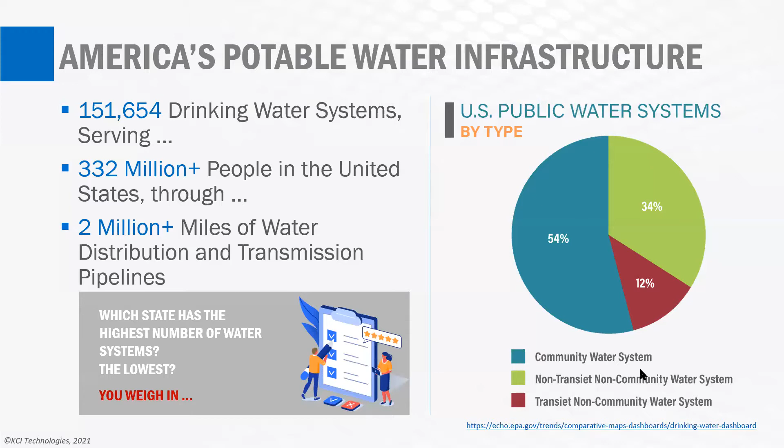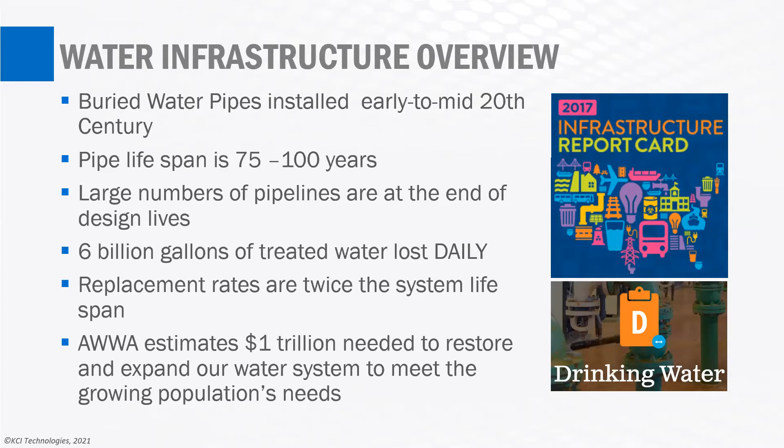Much of the buried pipe infrastructure is now between 75 to 100 years old, essentially surpassing their design lives. As a result, 6 billion gallons of treated water are lost every day through leaks, with an average of 240,000 water main breaks per year. Assuming every pipe would eventually need to be replaced, the AWWA estimates an associated cost of $1 trillion. ASCE's infrastructure report card gave drinking water systems an unflattering D grade in their 2017 survey.

The EPA, in its 2015 sixth report to Congress on drinking water infrastructure needs, states that $472.6 billion is needed over the next 20 years, with 66% of this amount in the distribution and transmission category, that is water pipes. Wow. In comparison, water treatment needs only 18% of that $472.6 billion.

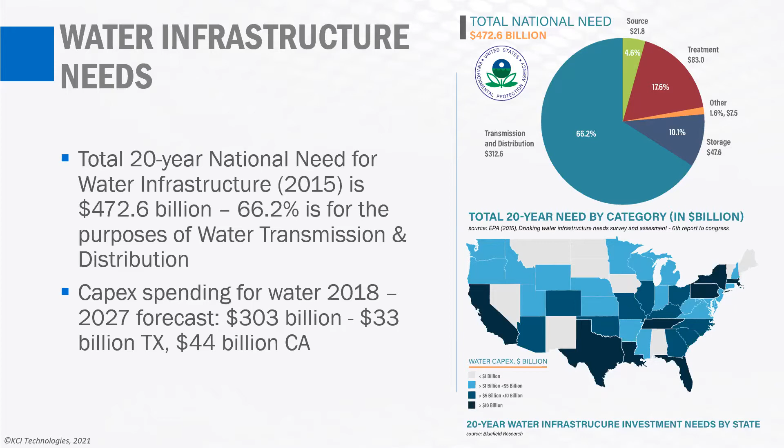In another study that looks at capital spending, between 2018 and 2027, CapEx is forecast to be over $300 billion in the United States. Two of the largest spenders are going to be California at $44 billion and Texas at $33 billion.

There are two main types of pipes used in a water utility system: transmission pipelines and distribution pipes. Transmission lines carry large quantities of water from a source of supply to a treatment plant, or from a treatment plant to the distribution system.

Transmission lines generally range in size from 16 to 24 inch up to as high as 144 inches, 12 feet in diameter. In some systems in the Western United States, there are pipes as large as 256 inches, or 21 feet in diameter.

Transmission pipes generally run in straight lines from point to point, have few side connections, and are not tapped for customer service.

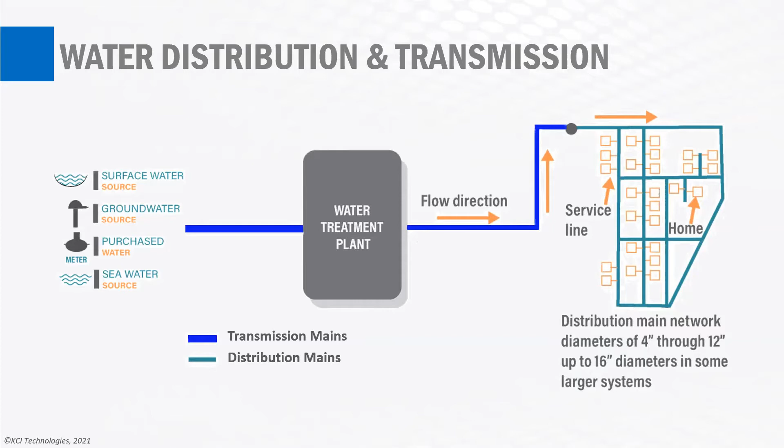Distribution mains, on the other hand, are the smaller pipes that carry water from the transmission system and distribute it to homes, businesses, and all other parts of the community. These diameters typically range from 4 to 12 inches. In some larger systems, you may find distribution lines as large as 16 or sometimes even 24 inches. Distribution lines typically have many side connections, and tapping is done frequently to provide water to customers.

So again, in today's presentation, our focus will be mainly on large diameter transmission pipe design, construction, and maintenance. Large diameter transmission lines in service today include primarily welded or riveted steel pipe - the riveted stuff comes from pre-World War II.

Reinforced concrete and concrete cylinder type pipe, such as prestressed concrete cylinder pipe, and cast iron and ductile iron pipe. Iron pipes are typically no larger than 64 inches, while steel and concrete pressure pipes are up to 144 inches, and of course larger in some cases.

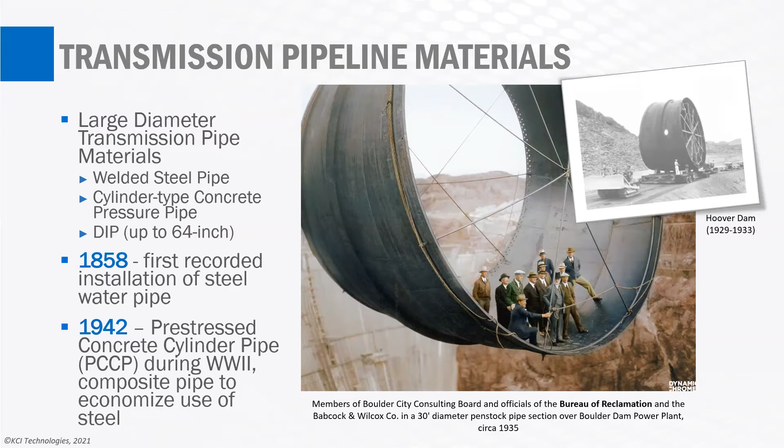Steel pipe, that is riveted steel pipe, was first installed in the United States in 1858, and prestressed concrete cylinder pipe was first made during World War II in 1942.

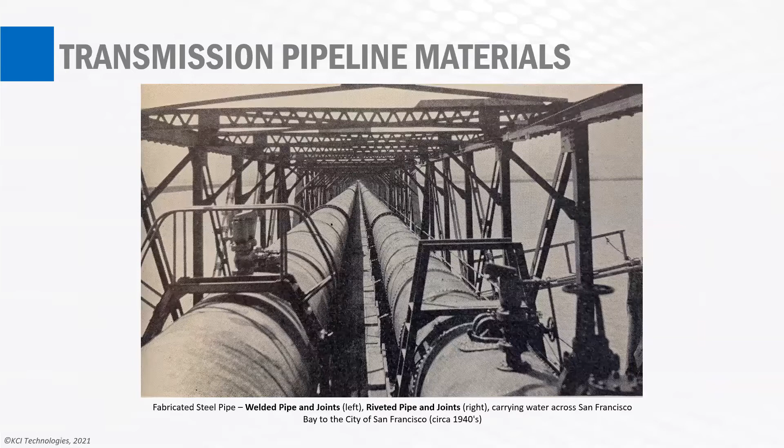This picture shows new and old technology from the 1940s. That is a welded steel pipe, which is the one on the left-hand side, and a riveted steel pipe on the right-hand side, carrying water across the San Francisco Bay into the city of San Francisco.

Welded steel pipe used for water transmission is also called spirally welded steel pipe. As shown in the top left drawing, steel coils manufactured to the thickness of the pipe, accurate to 3 decimal places, is helically wound into cylinders, while both the inside and outside seams undergo fully submerged arc welding.

These cylinders are then typically cut to 50-foot lengths, hydro-tested, and then ends are treated per the type of joint specified for the project, and coatings and linings are applied for corrosion protection. The final products are relatively light compared to concrete pipes of the same diameter.

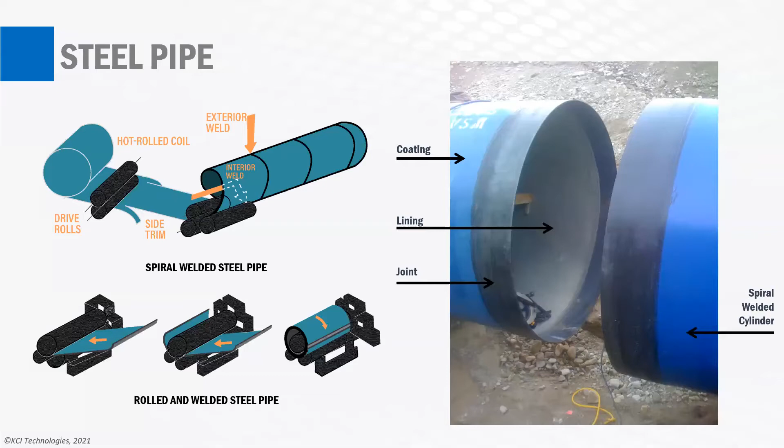The other type of steel pipe shown on the bottom left drawing is called rolled and welded steel pipe. Casing pipes are typically made as rolled and welded steel pipes.

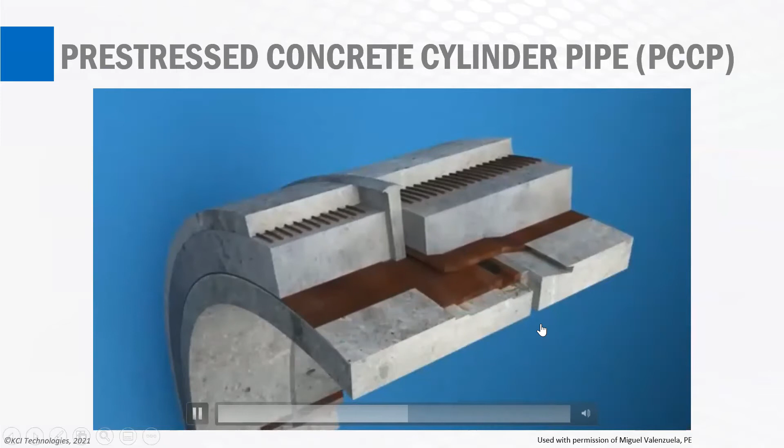Finally, prestressed concrete cylinder pipe. During World War II, PCCP was the result of our efforts to minimize the use of steel in high pressure, large diameter water pipes, since steel was needed for the war effort.

Lined cylinder pipe was made in 1942, while embedded cylinder pipe was made in 1953. The steel cylinders used in PCCP are first hydro-tested, just like with steel pipe, after which joint rings are welded to the cylinders. In embedded PCCP, the steel cylinder, as shown in this cross-section, is cast within a concrete core.

After curing, hard-drawn steel wire is helically wrapped around the exterior of the cylinder. This results in producing a predetermined compression of the concrete and steel core. The wire is then covered with cement slurry and dense mortar coating for corrosion protection.

Lined PCCP ranges in diameter of 16 inch to 60 inches, and embedded PCCP range in diameters of 24 to 144 inches. It's estimated that between 1942 and 2006, some 19,000 miles of PCCP were manufactured and installed in the United States.

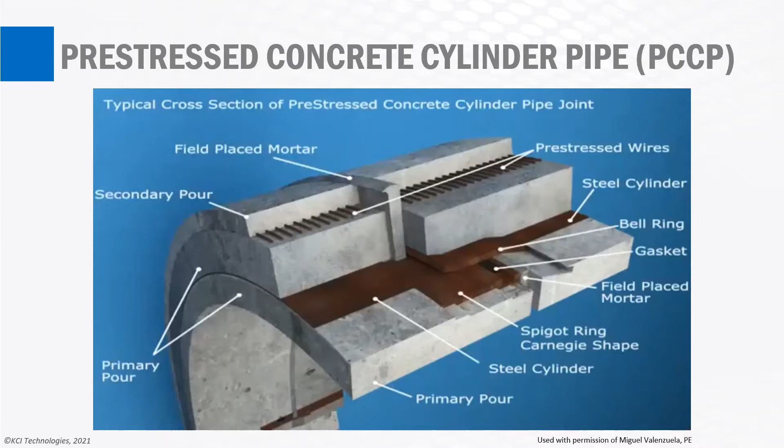So that should give you a little bit of background on primarily the 2 types of materials that we're going to be talking about throughout this presentation. With that, I will pass the presentation now over to my colleague, Dennis Atwood.

Thank you, Shaw. So I've been involved in a lot of conversations where we talk about large diameter pipe, and inevitably someone makes the remark that it's different. And so I wanted to try to see if we can focus a little bit about what is really so different about large diameter pipelines.

I've taken 5 areas, which I think talk about some of the issues we have and things we need to consider when dealing with large diameter pipelines. The first thing I'll be talking about is selection of pipeline alignments. Then we'll discuss risks in a small amount, types of large diameter pipelines, large diameter valves that go with large diameter pipelines, and of course construction, inspection, and testing for large diameter pipelines.

Okay, so the first thing, selecting pipeline alignments. Now, what are some of the challenges that we have? The importance of selecting the best pipeline alignment cannot be overstated. Choosing the right alignment can save millions of dollars in construction and land acquisition costs, not to mention the disruption to the public.

Now, cities are continuing growing and need water to be able to accommodate this growth. Most cities' existing water sources are fixed, and developing new sources is usually not an option. So it becomes necessary to bring water from the source to where it's needed. So the question arises, how do you get from here to there with a transmission main?

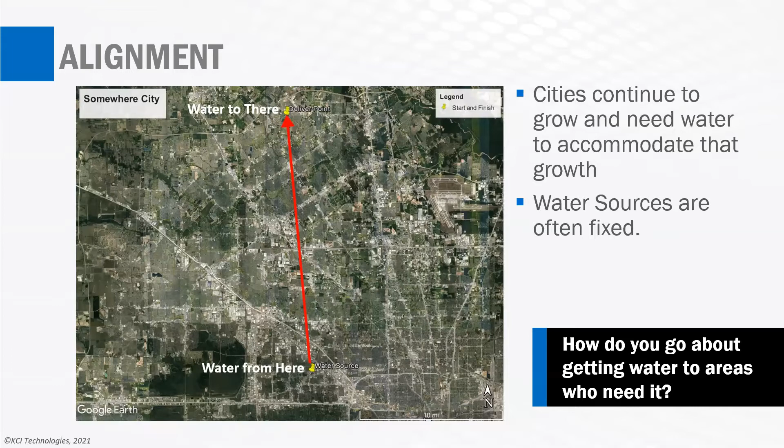Now, traditionally, we've relied on our existing street infrastructure for pipeline corridors, but as more and more development has occurred, our streets have become congested with utilities. You may be able to snake small utilities or water lines through these congested streets, but when it comes to large diameter pipelines, that's another matter.

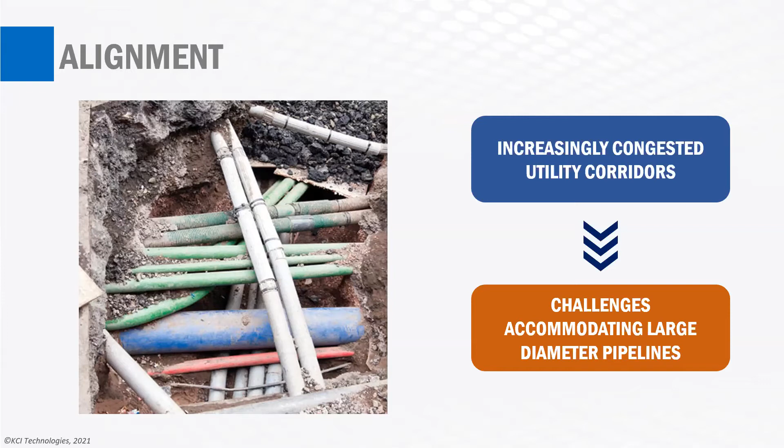Large diameter pipelines have large footprints and will take a large portion of the street during construction. Installing a large diameter pipeline will also use considerable real estate and make it difficult to accommodate other utilities in the future. So transmission lines usually span great distances in order to bring water to growing areas.

As cities begin to sprawl, all the new growth seems to be on the peripheral, whereas a lot of the water sources are more towards the center or one end of the city, as that is how the city grew.

Just to give an example of how large some of these transmission lines can be or how long they can span, I'm currently working on a project in the city of Houston, which is 17 miles in length. And the longest one I've worked on was over 30 miles. So you have considerable real estate to cover that you need to consider how you're going to go there.

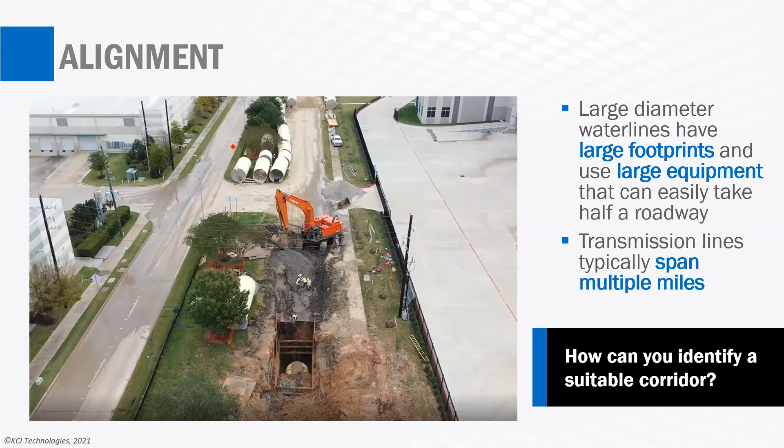Traditionally, before computing and GIS, what we used to do is take a map and determine 3 to 5 possible alignments. Each alignment would then have to be vetted for feasibility. A set of criteria was developed to evaluate the alignment, and the evaluation results were input into a matrix for comparison. Based on the methodology, the preferred alignment was selected from the results of the comparison. This method, however, always left you wondering if you had indeed captured the best alignment.

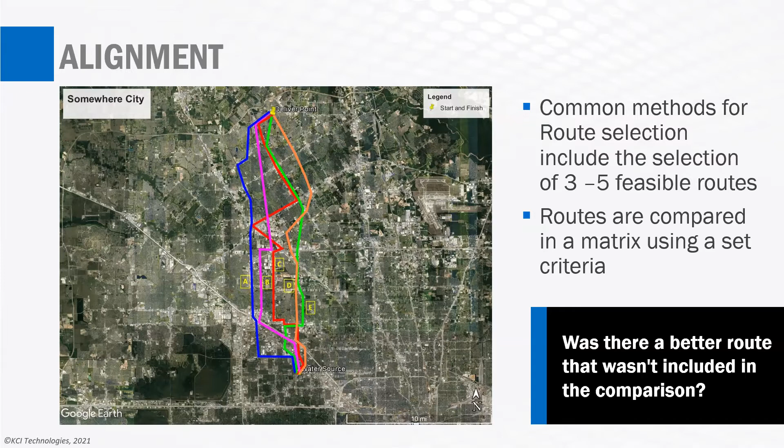With projects costing in the hundreds of millions of dollars, a slight variation in alignment could save the project several millions of dollars and have other unknown benefits.

With the advent of computers and GIS, this has opened up a whole new avenue of analytical methods by which we can determine our best alignments. We do this every day when we want to get from one point to another while driving. We open Google Maps, enter a destination and an origin, and presto, Google Maps gives us the best route based on the fastest route, the shortest route, or the least congested route, depending on what input parameters we gave it.

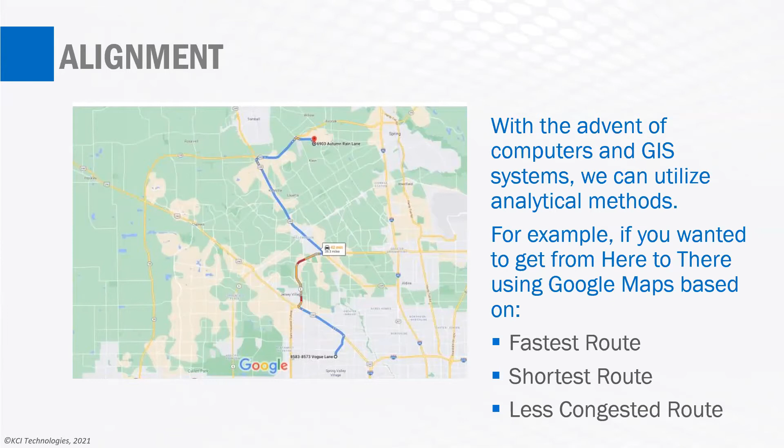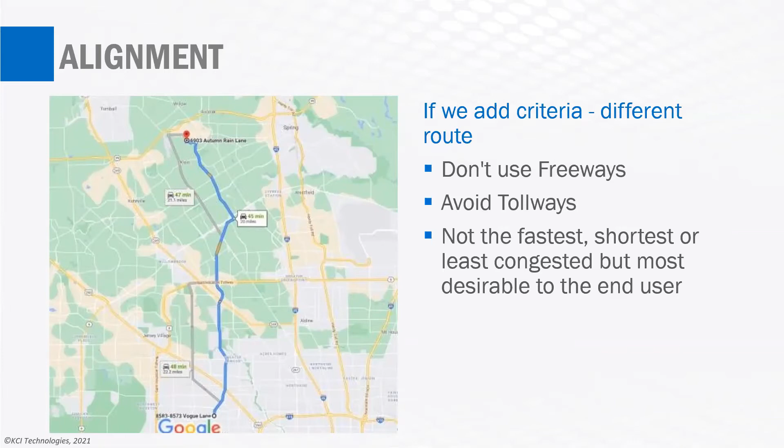But what if someone doesn't like to use freeways or wants to avoid tollways? You can change the input criteria and the program gives you a new alignment, totally different from the previous one it selected. It's not that this route would be the fastest, shortest, or least congested, but it's the most desirable route to the end user.

We can use a similar method when trying to determine how to fit a large diameter transmission line through a highly urbanized area. We want to find the best route, and what is important to one owner may not be as important to another. The beauty of this method is the ability to customize it to the specific wants and desires of the owners or the operating utility.

Some of the parameters we look for include length, which is the determining factor for cost and time to construct. But where we go might determine how businesses are disrupted, how much disruption to traffic, whether we're disturbing residences, whether there are specific areas to avoid due to contamination, large utilities that need to be crossed, freeways and arterial crossings which are always challenging, environmentally sensitive areas such as wetlands, and soil conditions that determine the ease or difficulty of excavation and dealing with water, along with whatever other criteria might be important to the owner.

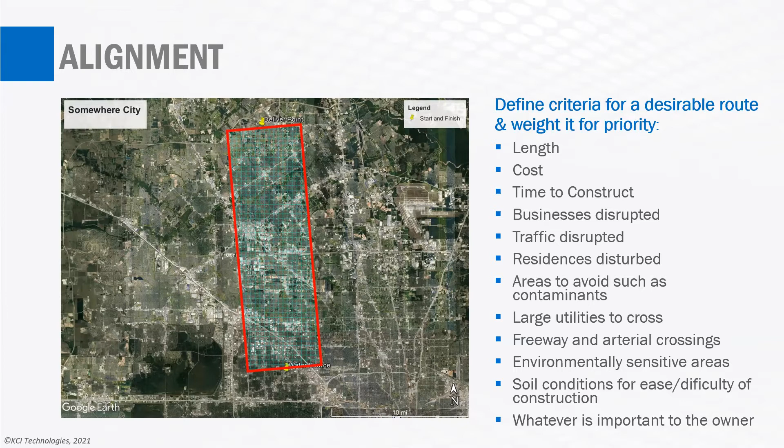So we establish this criteria, but take it one step further. We then weight the criteria because not all of it is equally important to the owner. By putting weighting factors, we can bring the most important ones to the top and the least important to the bottom.

What we do then is develop a grid or a network of links connecting the source to the delivery point. Each segment is individually evaluated against the assigned criteria, and values are assigned based on that criteria. The values are added together for each link to become an aggregate score, and the higher the score, the least desirable the link.

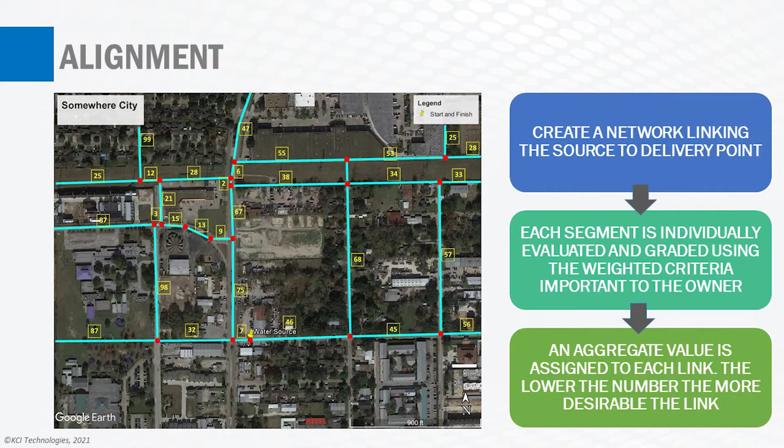Using an analytical program such as Network Analyst, the program determines the combination of links that connects the start to the finish with the lowest combined value. Network Analyst is just one example of a standard software program you can purchase, and it works within ArcGIS to do this.

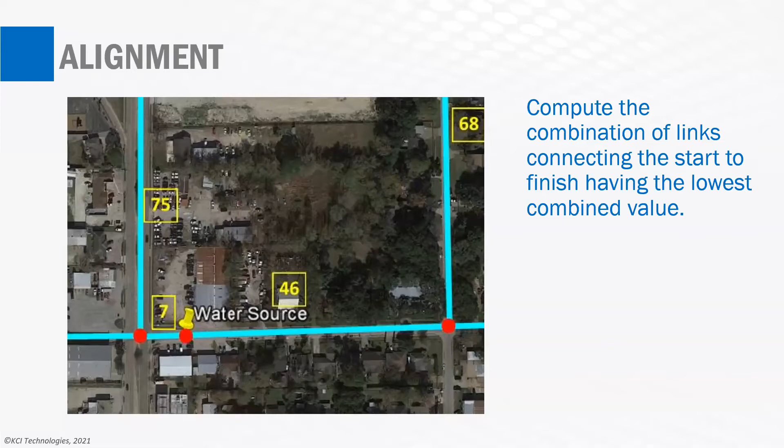But if you want something more customizable, there are a number of programs out there. In one case, we had a graduate PhD student develop an algorithm that worked within GIS and would generate 100 different alignments sorted from the lowest score to the highest. A lot of entities still like to compare alignments, so you can take the top 10 or top 5 and do an individual analysis. The beauty of this type of program is it'll accommodate any kind of showstopper, so if you need to reroute your alignment, you can.

So as I said, the lowest combined value is the best or optimum route that meets the criteria. The analytical method will also allow you to estimate the probable cost, since cost was one of the factors input into that, and then it gives you its total length. And then the other thing is the estimated time to complete. So when doing your preliminary analysis and planning effort, these are some of the valuable parameters it generates that you don't have to recalculate or redo.

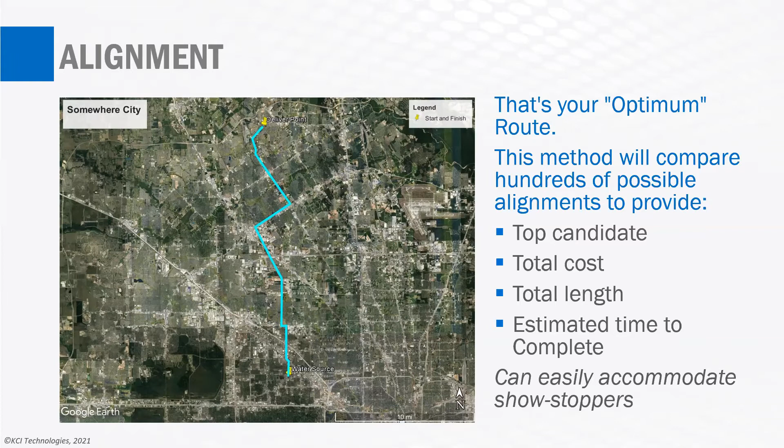Now, as you can imagine, this is a pretty labor-intensive methodology, particularly with these long links. There could be hundreds, if not thousands, of links that need to be evaluated, and so it can take considerable time. But the beauty of it is that, for a planning level effort, it gives pretty accurate results, and so you can work with it fairly well.

If you don't want to spend quite that much time on it, you can use other products such as the Geospatial Analysis. This Geospatial Analysis has similar criteria developed and entered into GIS colored layers or three-dimensional layers, whichever the case may be. The darker the color, the least desirable the area, or in the case of a three-dimensional area, the thicker the layer, the least desirable the area. Layers are then overlaid one on another, and then the lighter area connecting the start point to the end point is your most desirable.

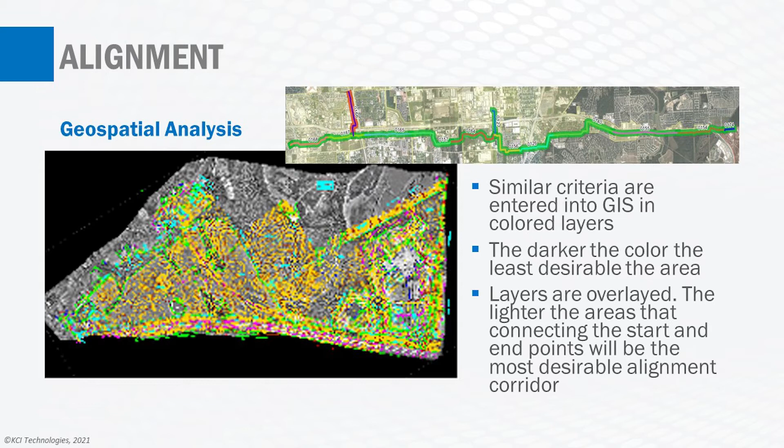The beauty about using three-dimensional areas is it almost creates a topographic map similar to where a river might run. And so you can easily identify the area of least resistance, which is your most optimum corridor.

Let's move on and talk a little bit about risks. Now, there are many risks that you can imagine to a project of this nature. We're only going to talk about a couple of them today. But normally risks are captured in a risk register, and risk registers may include 100 to several hundred identifiable risks depending on the nature of the project.

One of the greatest risks we face that's kind of unique to large diameter pipelines is hydraulic transients, or water hammers. There have been many documented cases of catastrophic pipe failure due to a hydraulic transient within the pipeline. Although water hammers or hydraulic transients occur in smaller diameter pipelines too, they're usually not of the same magnitude, and there have been few cases of pipe failures there.

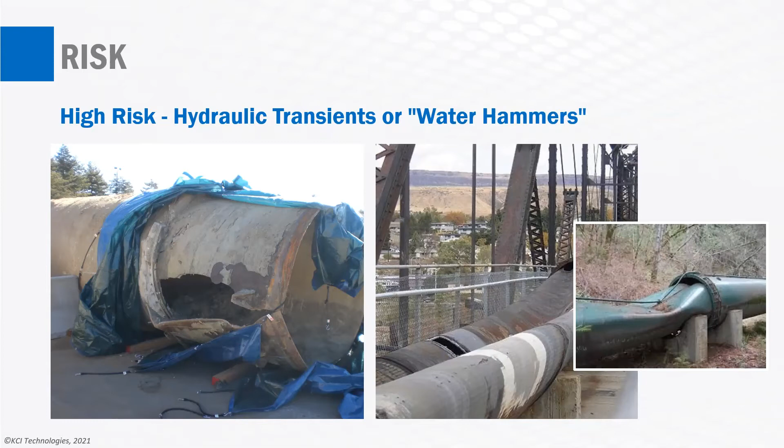Usually a factor of safety is already built into most smaller pipelines that accommodates these. But when we get to large diameter transmission lines that move high quantities of water, the surges created from a hydraulic transient can produce tremendous pressures, both positive and negative, as you can see from the failure modes of these pipes.

The primary way to mitigate this risk is to use a surge analysis program to model the pipeline and predict the surge pressures that the pipe could experience during a transient. The pipeline is then designed to withstand the initial pressure, which can be both positive and negative, as we saw from the previous picture.

Other mitigating measures can also be incorporated. Just as an example, we could add a surge tank to relieve that pressure, or to prevent hydraulic transients in the first place, include pump ramp-down protocols. Sudden pump shutoffs are one of the largest causes of surge, or if a valve is closed a little too quickly, that could be another cause. So a lot of our operating protocols can be steered to prevent surges from happening.

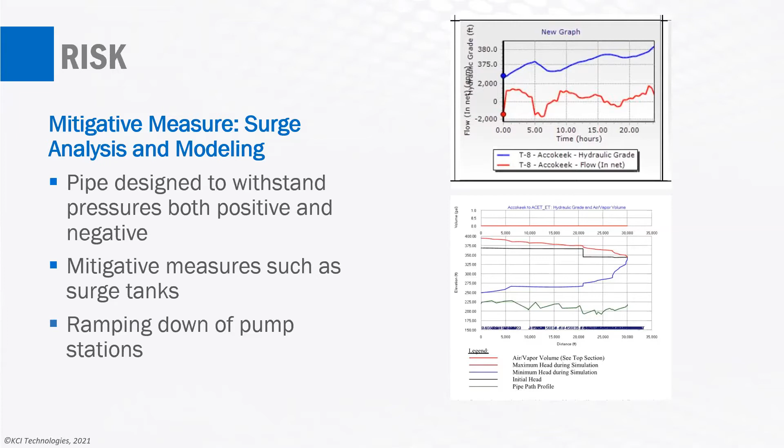Conflicts with utilities are probably the number one risk we face in construction today. Probably the largest source of change orders in a project is due to conflicts with existing utilities. Now, as I mentioned, large diameter pipelines have very large footprints, so if there's a rogue utility out there, it's highly likely that you're going to find it during construction.

So not only are they costly - in this case, the tunneling operation was down for about a week and a half while they relocated the line - so there was a financial cost there associated with standby, as well as a delay cost. But had that water line been ruptured with men in the tunnel, it could also have been a life-threatening situation.

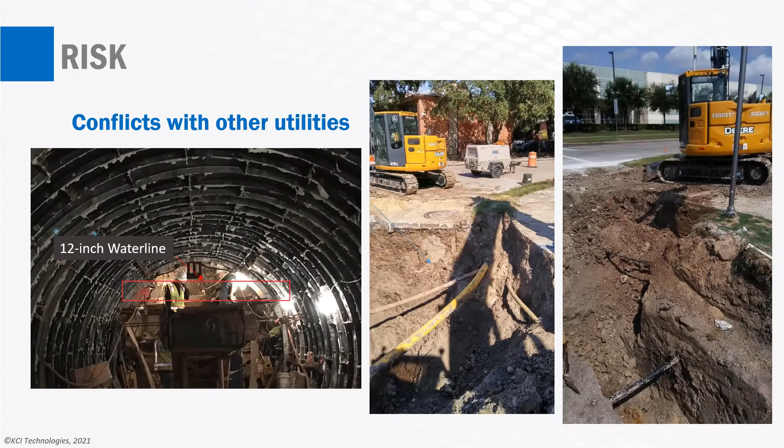So how do we deal with them? Well, of course, the number one method is to have a good subsurface utility engineering program that starts during design and is continued during construction. The subsurface utility programs, or SUEs as we call them, will be able to identify where there are lines that might not necessarily have shown up on plans.

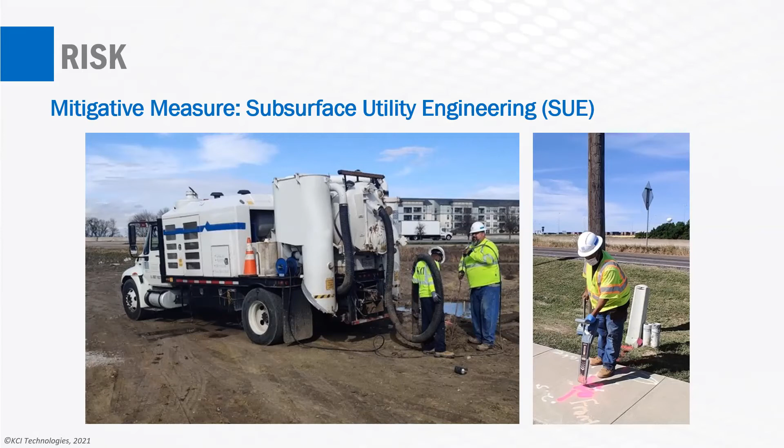They can also use a soft dig vac truck, such as the one in this picture, to find the top of that line so it can be shot and hard located in the field. The beauty of this technology is that it's very unintrusive, so the chances of disrupting any utility are very small. In the old days, as many old-timers know, we used to use backhoes to excavate, and backhoes can be just as dangerous as trenching operations. So we've come a long way since that time.

Let's talk a little bit about the types of large diameter pipelines. This program is specifically talking about concrete and steel, but there are really four materials readily used for pipeline materials. Of course, the most popular and widely used is steel. Concrete is highly used, and then in sizes under 64 inches, ductile iron is pretty well used, especially in the smaller to mid-range. The real small lines, of course, are PVC. And then fairly new to the market is fiberglass pipe, which can go up to 110 inches in size.

Now, all of these pipes, with the exception of concrete, are considered flexible pipe. And although you may not think of steel as being flexible, you'll certainly appreciate that as you see it hoisted if it's not restrained properly. It can flex quite a bit, as does ductile iron and fiberglass.

So the significance of that is that flexible pipe relies on the subgrade or the pipe embedment for its structural strength. So once it's loaded from the soil overburden or any other loads on the surface, what prevents it from deflecting outward is its ability to draw strength from the trench soil surrounding it.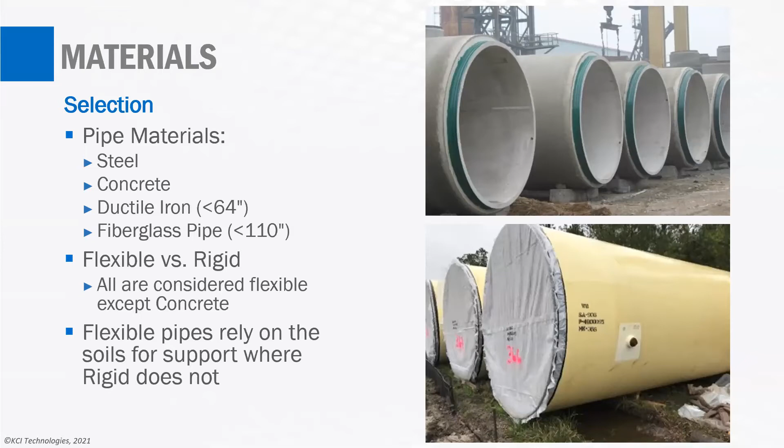Now, one of the things that is kind of unique about steel pipe is its ability to be customizable. It's the only pipe of these materials that is. The rest are more of the nature, if you want to use the phrase, off-the-shelf products. They're cast, usually using molds or machinery that will put out certain sizes or certain pressure classes of pipe. So what you get, you have to order what you get.

And so if one class doesn't work for you, you go to the next class. Whereas with steel, it's built to exact specifications provided by the engineer. The engineer calculates the pressure the pipe needs to withstand and determines what thickness the pipe needs to be, also what kind of joints will be used, and I'll talk a little more about joints in a minute, and the lining, based on what the application is and what fluid you'll be transporting.

The lining is mortar lining for water. That's most commonly used, but not entirely used. There are flexible linings that can be used on the interior. And then, of course, the coatings, similar to the lining, can be either rigid or flexible depending on what kind of interaction it would have with the surrounding soil. So all these things are specified by the engineer and then sent to the factory, and the factory manufactures the pipe based on those specifications.

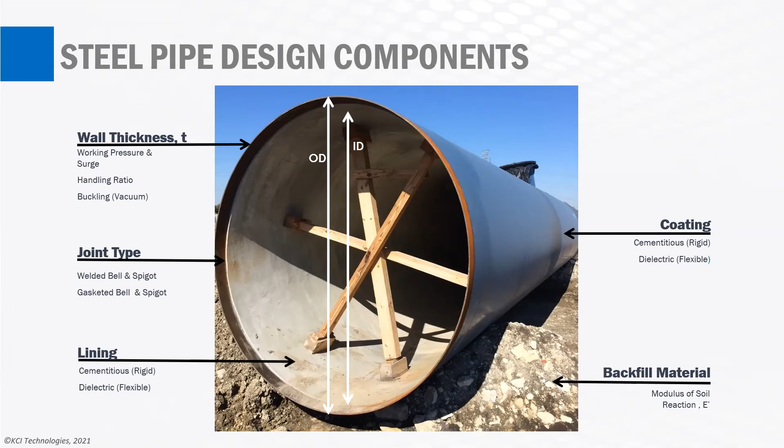Okay, there are four basic joint types that are used, and the most common is the lap joint and the butt strap. The beauty of the butt strap is it has the ability to make up pieces that are irregular, so you can cut pipe in the field and put two pipes together and then make a joint.

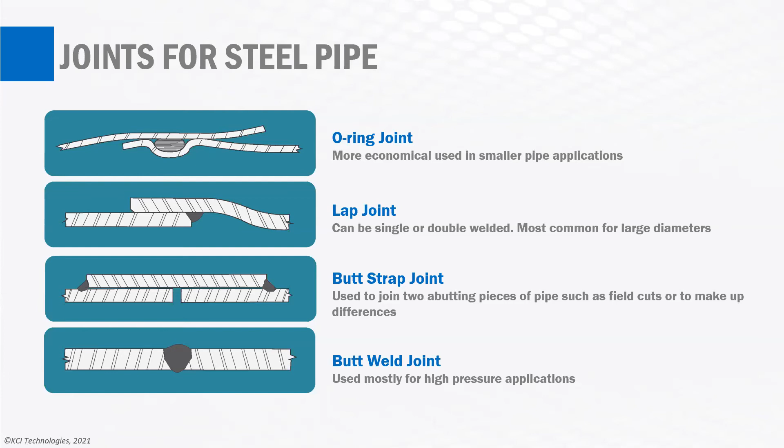With large diameter pipes, you're going to also have large diameter valves. Gate valves are the most common in water systems up to 24 inches, after which butterfly valves are used for economic reasons. This is a 108-inch butterfly valve weighing in at a whopping 40,600 pounds, not including the actuator, which weighs another 3,400 pounds.

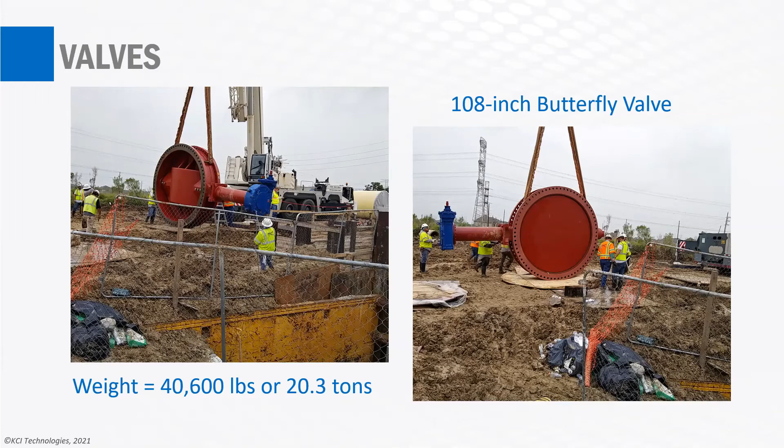The butterfly valve must be lowered by crane and matched to the 72 bolt holes on each flange, for a total of 144 bolts to be set. At 20 tons, the worker is not maneuvering that valve.

As an alternative, butterfly valve assemblies can involve burying flanged pipes vertically, then bolting the valve, and then a second flanged pipe is bolted onto the top of the valve.

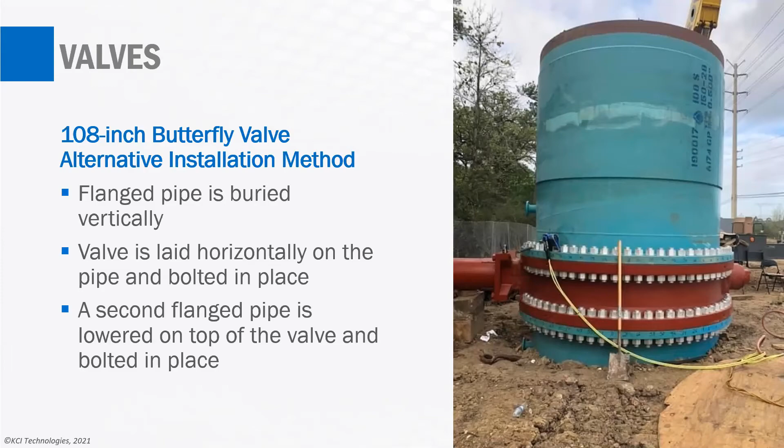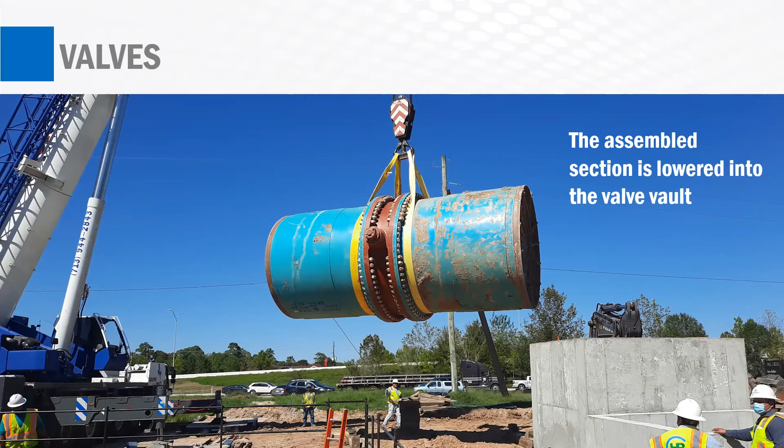The valve is then hoisted by the two flanged pipe and put into place.

The butterfly valve is then set in the valve vault, with the pipe being supported by the two reinforced concrete saddles. The men to the right are performing what's called a turn test to make sure that it takes just as many turns to open and close the valve as it did in the factory, which incidentally is about 405 to 415 turns.

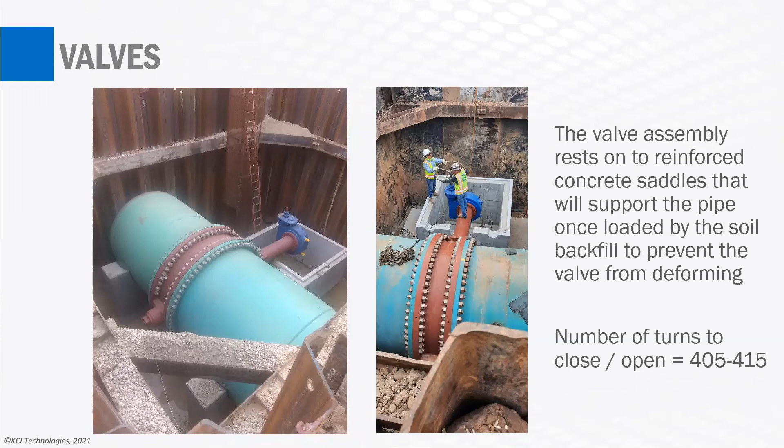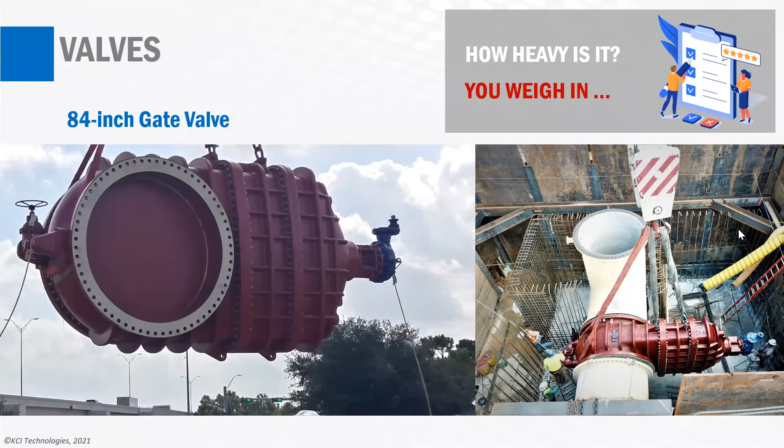Okay, let's go ahead and talk about construction, inspection, and testing for large diameter pipelines.

Open cut is the most economical installation method. Production rates for large diameter pipelines vary and are typically much slower in urban areas than across country. This method of installation shown here is known as weld after backfill, which speeds up the production rate by allowing the pipe to be welded in the interior after it has already been backfilled.

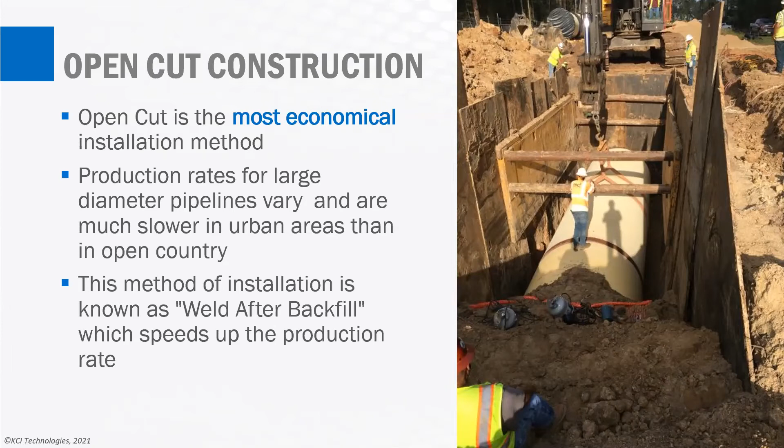When receiving large diameter pipelines, you must make sure that it's properly handled and stored so as to avoid any damage to the pipe. The pipe must be lifted using two slings to avoid any point loadings on the pipe. Likewise, it must also be stored properly using angle blocks to avoid that same point loading, which can deform the pipe and crack the lining. The pipe must also have end caps to prevent the mortar lining from drying out.

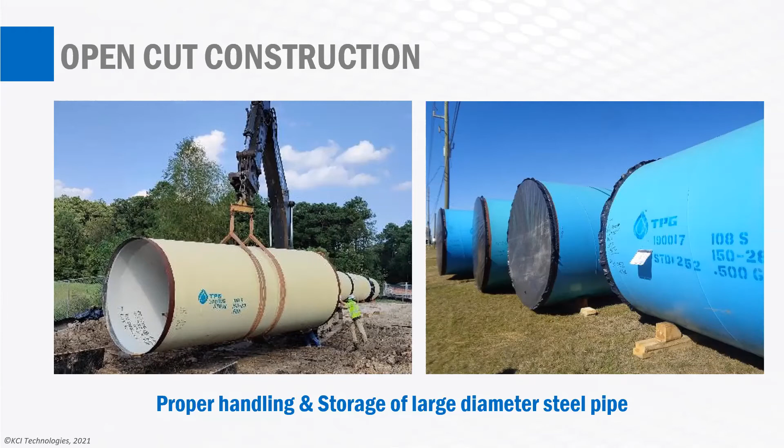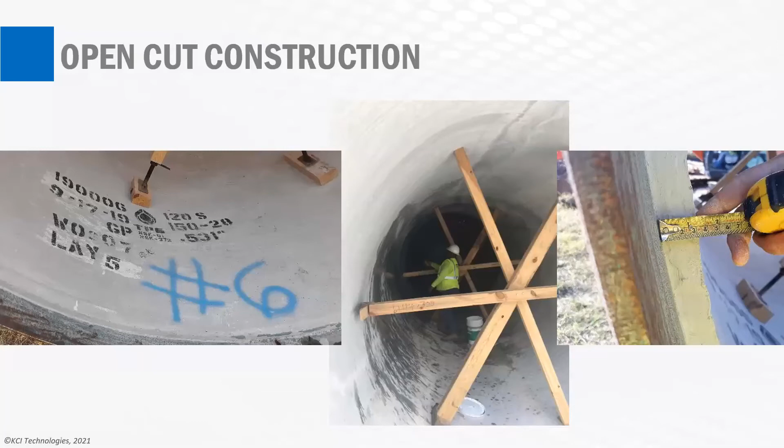Each pipe has a unique number which is recorded. The lining is inspected for proper thickness and for cracking prior to installation.

The pipe needs to be properly bedded to make sure it's structurally supported. The material being used here is concrete sand. The pipe also has stulls installed in the pipe at the factory to prevent the pipe from deflecting during transportation and installation.

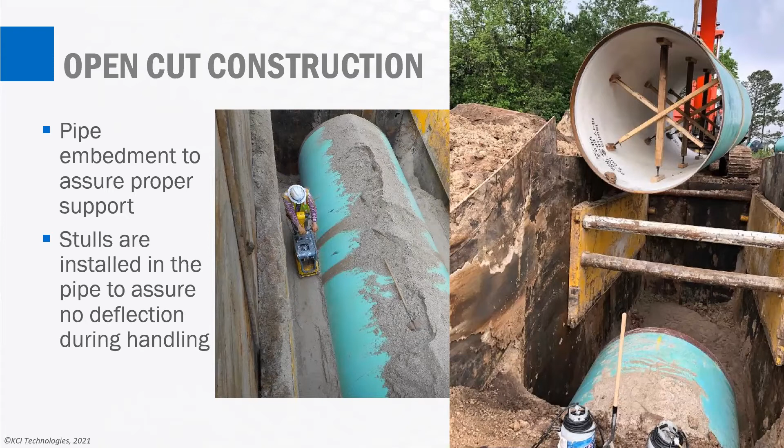Three basic types of shafts are used during tunneling. Tunneling is used whenever open cutting becomes unfeasible. The shaft to the left is rectangular, using soldier piles and sheet piling for certain soil conditions. When the soil conditions are a little better, we use circular shafts—the one in the middle is steel liner plate. And then the one on the right, where the soils were the best, they use ring beam and wood lagging.

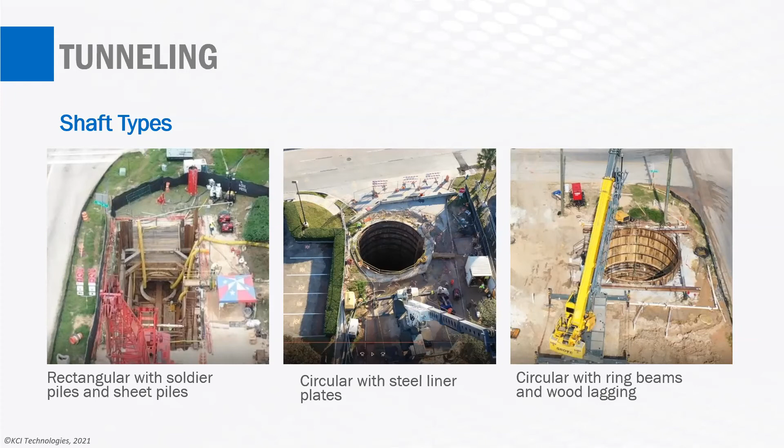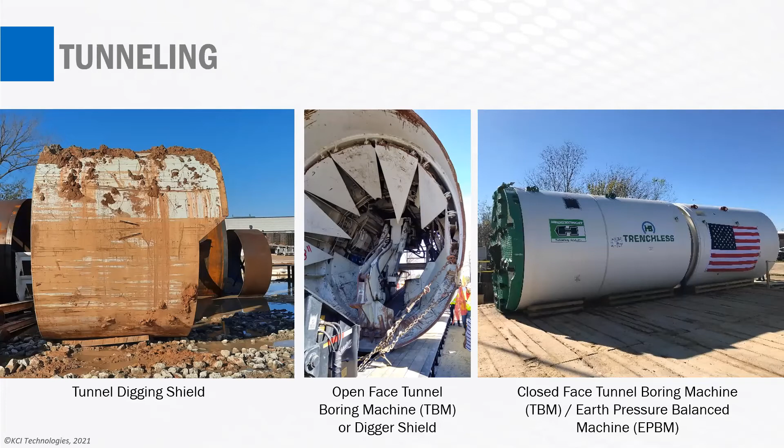Okay, three types of TBMs are used to tunnel. The one on the left is a digging shield, where the shield protects a live crew that excavates the tunnel and is pushed forward with jacking. The one in the middle is called a digger shield or open face TBM, which has an open face—if you look in the middle, it has a hydraulic arm which digs and pulls the material back into the conveyor belt. And the one on the right is referred to as a closed face TBM. This particular one is a specialized closed face called an earth pressure balance machine, used in areas of very poor soils.

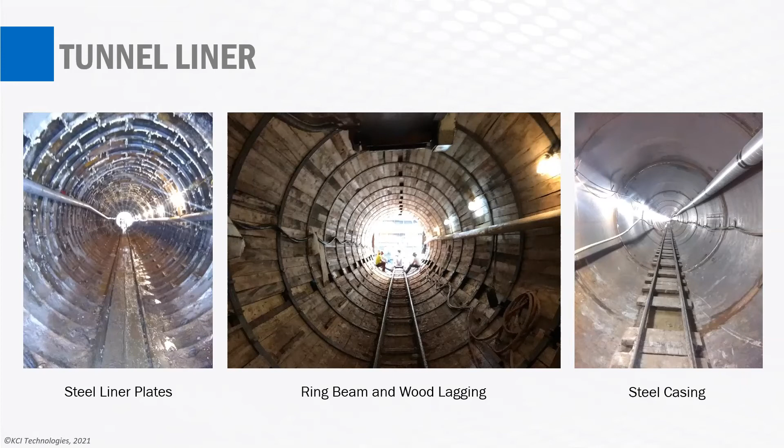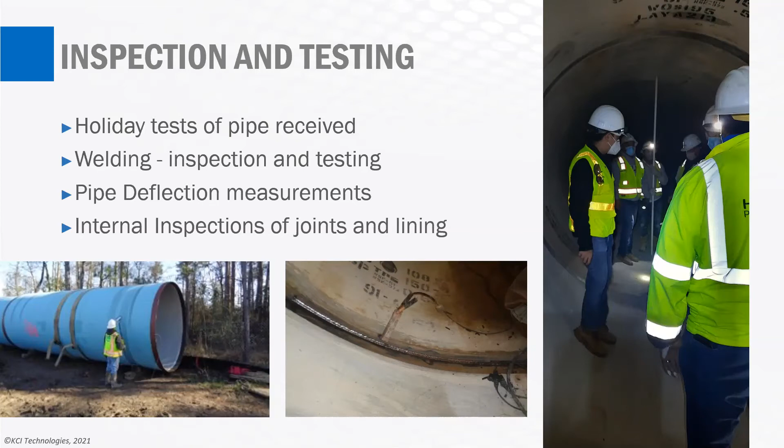It's important to inspect the pipe to make sure everything is as it should be. On the right, we see a crew going through the pipe measuring its deflection to make sure the pipe is round and that there are no excessive cracks. In the middle is the welding - there's a certified weld inspector who inspects every weld to make sure it passes. On the left, they're performing a test called holiday testing to make sure the outside lining is adhering to the steel and that there are no voids or pinholes.

Finally, once the pipe has been inspected and cleared, it needs to be filled, which can take 2 or 3 days for the size of these pipes. They typically like to do it in sections rather than an entire pipe at a time. It's then chlorinated and pressure tested before being put into service. And with that, I'll turn it back over to Shaw.

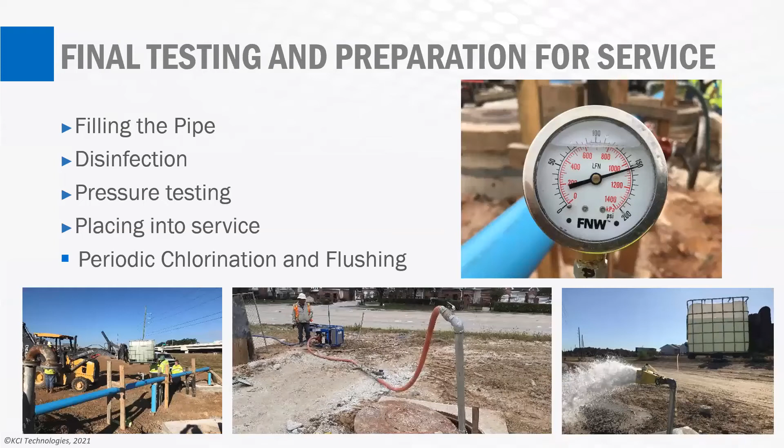Thank you, Dennis. So this is going to be one of those rare few presentations that talks about pipeline asset management and condition assessment and doesn't have a single picture of flooded roads and drowning people and vehicles.

However, I do want to talk about how it's become so normal for us to turn on the evening news to see these pictures, these scenarios unfold before our eyes on major roadways where there's been a huge flooding event because a transmission main has unfortunately collapsed. It has literally blown up and people and vehicles are now drowning.

So in the past, I'd say two decades, owners of transmission pipelines, these large diameter assets, have begun an organized approach to stay apprised of the condition of these assets to keep them at an acceptable level of reliability. This asset management approach is critical to maintain and support infrastructure networks.

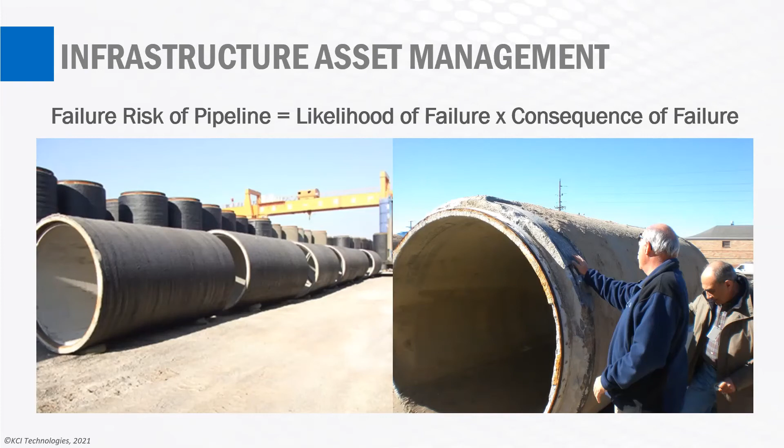Most post-World War II large diameter pipeline infrastructure for water transmission were built primarily with prestressed concrete cylinder pipe, with more than 19,000 miles, as I mentioned earlier, manufactured between 1942 and 2006.

However, the sudden catastrophic failure of PCCP was recorded as early as the mid-1950s and became much more noticeable in various systems around the country by the 1980s.

In their 2006 AWWA Water Research Foundation study called The Failure of Prestressed Concrete Cylinder Pipe, Andy Romer and Dr. Graham Bell found that one rupture and 66 other failures occurred for every 50 miles of PCCP within 50 years of installation. The study listed 592 individual failures with details spanning 35 states and the District of Columbia.

There are more than 20 reasons listed for these failures, including one that is widely understood by many in this industry who have dealt with this - the concept of hydrogen embrittlement of the prestressing wires.

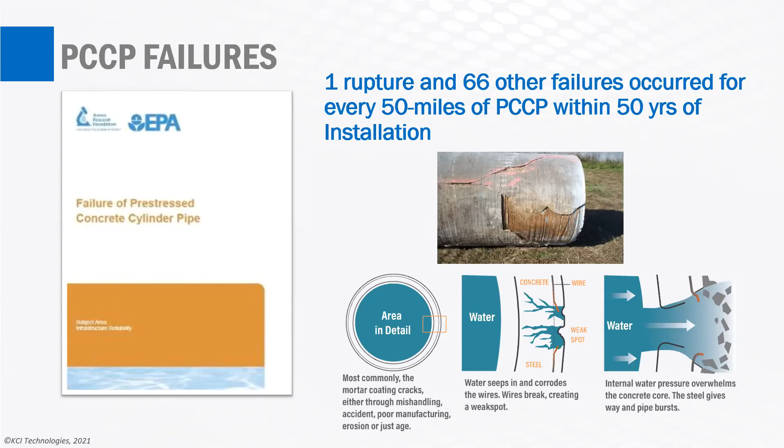There are now many tools available for the assessment of existing buried pipeline assets. Using the data gathered from these technologies, we can determine the likelihood of failures and prioritize repairs to stay within our limited infrastructure budgets.

Before getting into a full-blown, cost-prohibitive condition assessment program, a utility can do some desktop analysis, such as looking at a pipe's material, its age, diameter, and most importantly, any failure history.

This can then be followed by above-ground assessments, for example, soil corrosivity, electrical potential, stray current, correlator leak detection, and pressure monitoring.

And then if these findings warrant it, the next step can be internal assessment of the pipeline to detect leaks and gas pockets, as well as visual and wall condition assessments.

The most advanced condition assessment programs will typically include transient pressure monitoring, leak detection and finding air pockets in a line, and then employing electromagnetic inspections, which can yield the number of wires that may be broken within a given section of pipe.

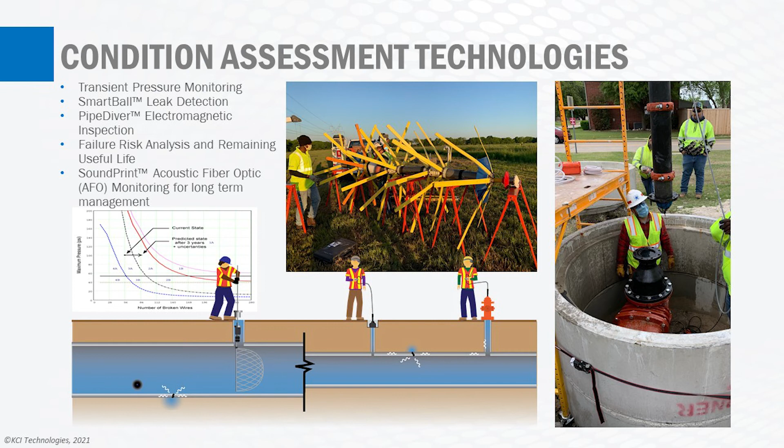And on a more long-term basis, acoustic fiber optics, known in the industry as AFOs - AFO monitoring is a long-term solution and provides real-time data. It's a technology that can detect wire breaks within pre-stressed concrete cylinder pipes as they occur while the pipe is in service.

Finally, let's take a look at some rehab options that are pretty universally accepted. I have taken the liberty to label each of these technologies by whether they're used as a localized repair.

These technologies are typically used when the consequence of a failure could be very high, which is usually the case in large diameter lines, or for a more comprehensive repair, meaning longer segments of the line involving more than just one or two joints - usually a quarter mile, half mile or more - are rehabilitated.

Again, you're looking at which technology should be employed based on the risk of failure of your line. The price tag on these technologies can vary substantially, so it's important to pick the method that meets the specific needs of the utility.

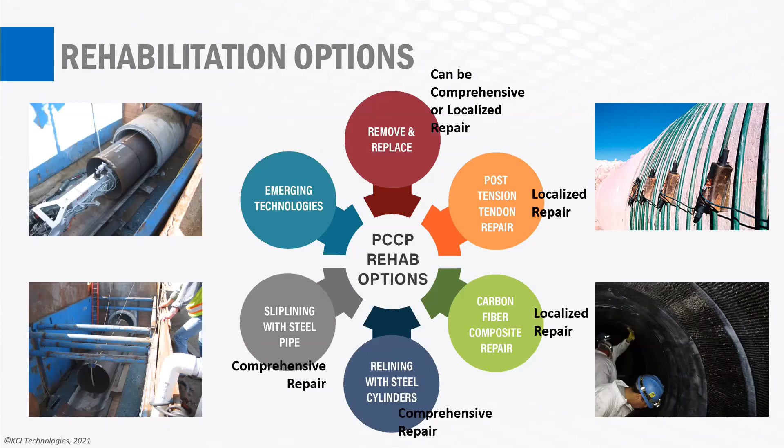Finally, under emerging technologies, one of the more common ones I'm seeing more and more right now is a hybrid FRP system, called a StrongPIPE system, which is essentially a steel reinforced polymer system where high strength steel wire is sandwiched between longitudinal layers of glass FRP and a polymer matrix.

The longer it takes to put these things into place, the more costly it is, and the more inconvenience it causes to others or in the vicinity of the construction.

Also, regarding 100-year service life, is it realistic to assume that this particular technology has been around long enough for you to believe it will last 50, 75, or 100 years, whichever service life you choose? I've seen a lot of utilities go with a 50-year design life, which is what many of them are comfortable with.

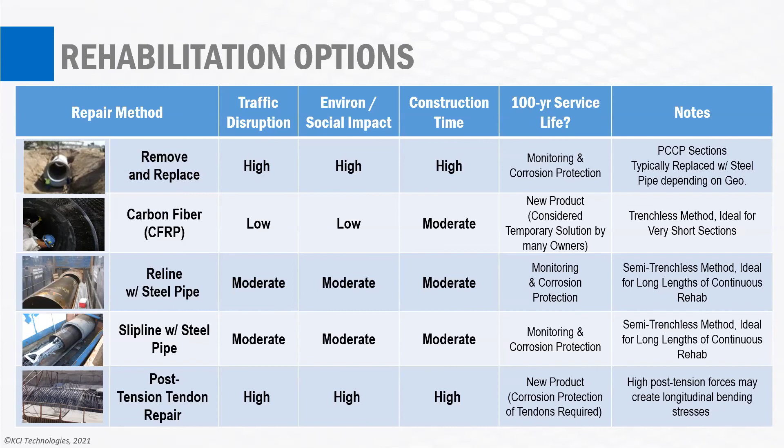Two of these technologies I'm going to look at more closely in the next couple of slides are the ones most widely used. The first is carbon fiber reinforced polymer, CFRP.

In 2018, AWWA published a standard for CFRP renewal and strengthening of PCCP. It's based on an LRFD design methodology, and it looks at a number of different aspects of the long-term service of this lining system.

This includes things such as internal working pressure, internal working pressure plus transient pressure, and what will be the result of the weight of the pipe and fluid on this lining system, as well as earth loads above the pipe and how that will affect the lining.

What about live loads? I've seen a lot of these systems where, even though there were no original plans of putting a road on top of a rehab being done right now, eventually a road comes on top of that. Now what? Well, you can retrofit it and make the pipe actually stronger by incorporating CFRP inside the pipe.

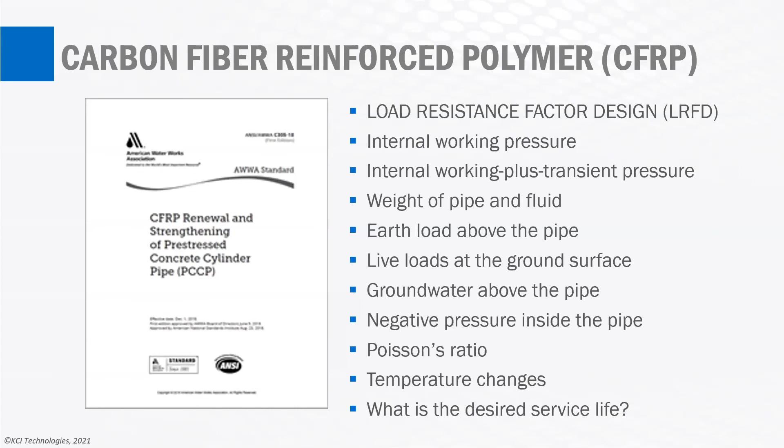A very important part of an effective CFRP system is the surface prep, where you have to hydroblast the inside surface of the PCCP. If needed, you may need to make additional fixes to concrete portions that may have fallen off, reinforcing and patching them prior to application of the carbon fiber.

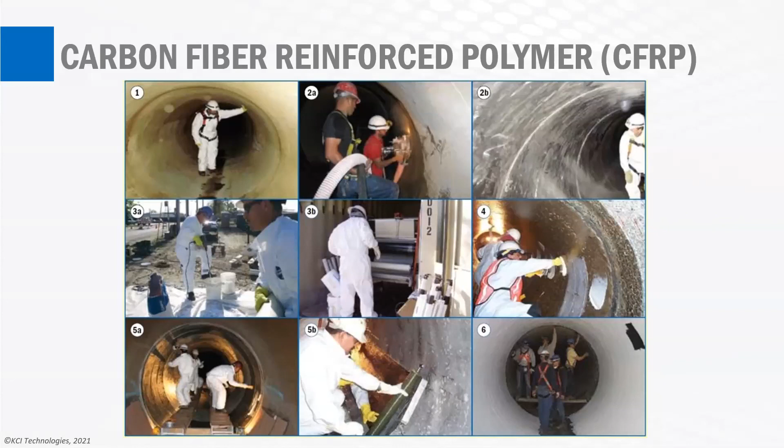These systems are wet layup systems, where you put on layer after layer internally, so it's essentially a trenchless procedure. One of the keys to the long-term success of CFRP is joint completion. It's very important to terminate the joints properly so that water doesn't get in behind the liner once it's been put into place.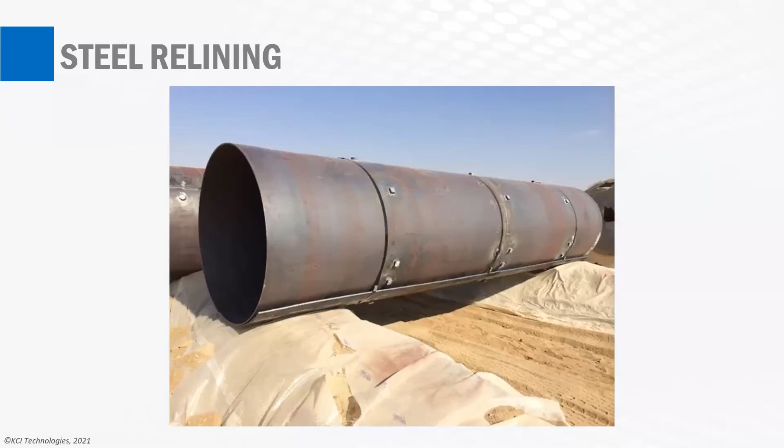The last thing we're going to look at is steel relining. As you can see in this picture, this is a collapsed steel cylinder, which was first made and then cut longitudinally, folded up, and tied with steel straps.

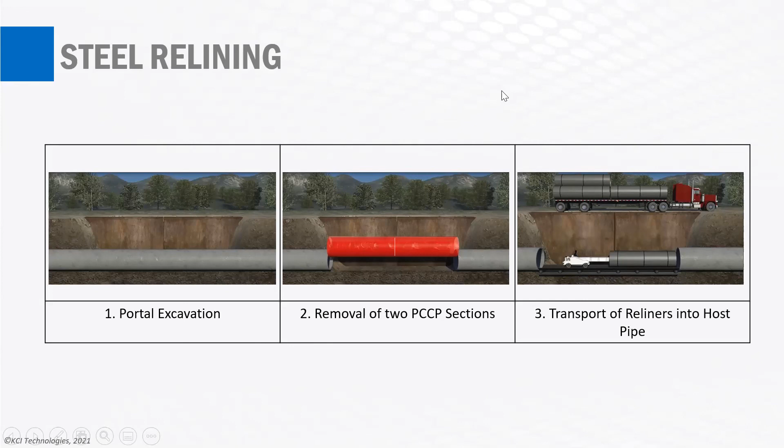You start by removing two PCCP sections from your first portal, through which you enter the PCCP host pipe. You transport the reliners into the host pipe.

Once they're in place, you cut the steel bands, and if you haven't experienced it, you should - if you ever get the opportunity. It's like a nuclear explosion inside the pipeline once the steel bands are cut and the cylinder opens back up. Once it's opened back up, it's fitted.

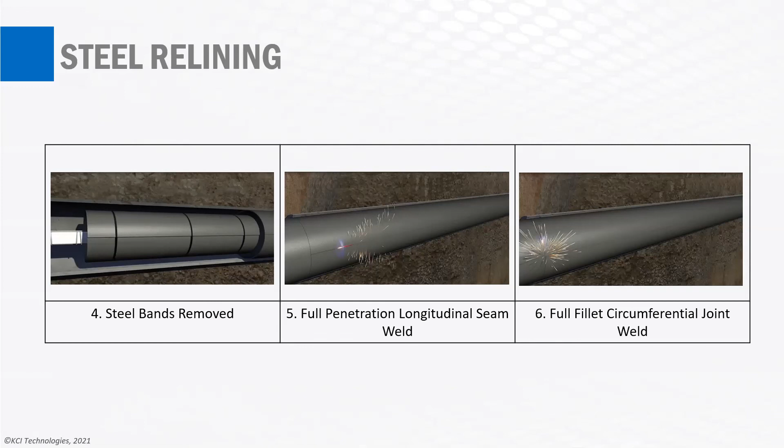They apply full penetration longitudinal seam welds and full fillet circumferential joint welds. Once this is done, in the portal where the two PCCP sections were removed, they replace that with two new pieces of steel pipe, put that within reinforced steel and concrete, and then fill the portal back up.

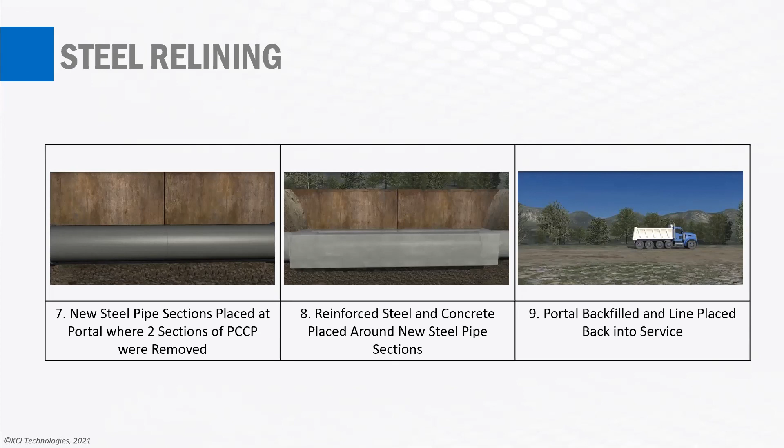One last thing they do with these relining systems is go back in and apply a cement mortar lining on the inside.

So with that, I just want to present a quick summary of the things we've covered. We tried to keep this at a lower level. I recognize there are a lot of 500 and 600 level experts watching this presentation, but really this was meant more for people who may not know much about pipes at all.

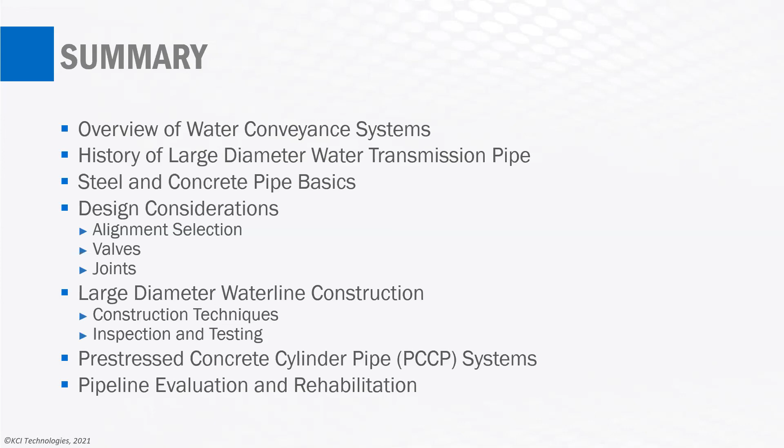So we tried to cover a little bit about the history of large diameter transmission pipes, water pressure pipes, particularly steel and pre-stressed concrete cylinder pipes. Dennis talked about different design considerations, as well as construction and inspection topics. And then I looked at condition assessment of pre-stressed concrete cylinder pipes, how to assess your lines, and different technologies that are out there.